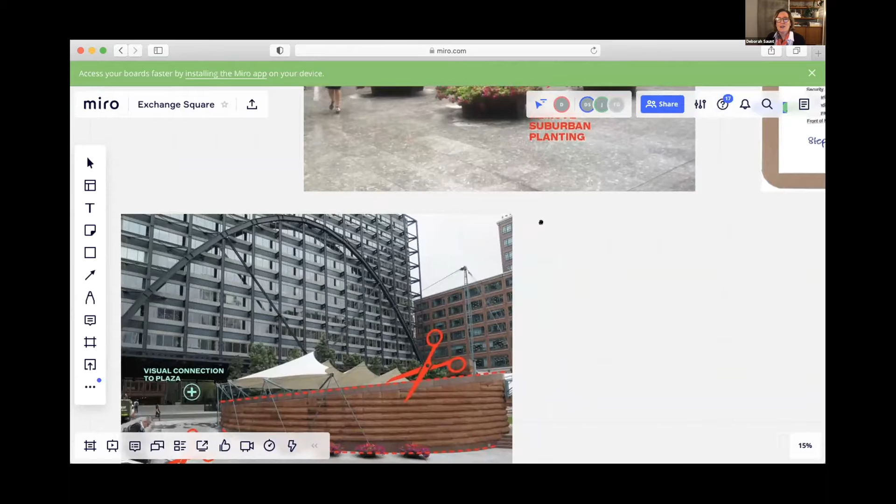And I think our most poignant commentary from a horticultural point of view, James might agree, was there was a preponderance of what we called suburban planting in these rather awkward planters. And the sense of nature seemed to be extremely mediated and sort of controlled.

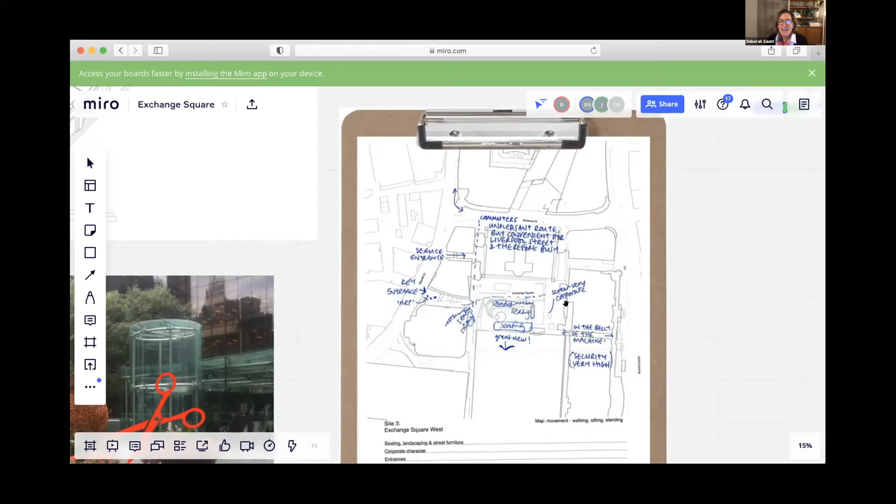So the idea of being outside, we wanted people to really feel that. As part of the competition, we set out with our whole studio to look at what people were doing on the site. We did a quick survey discovering how people were using it - for example, in Exchange Square there was a great view, but to get there you had to go through the belly of the machine, and there was an unpleasant route nearby that was very convenient. So it was a kind of ganglion of things going on, and we wanted to bring simplicity and clarity to it.

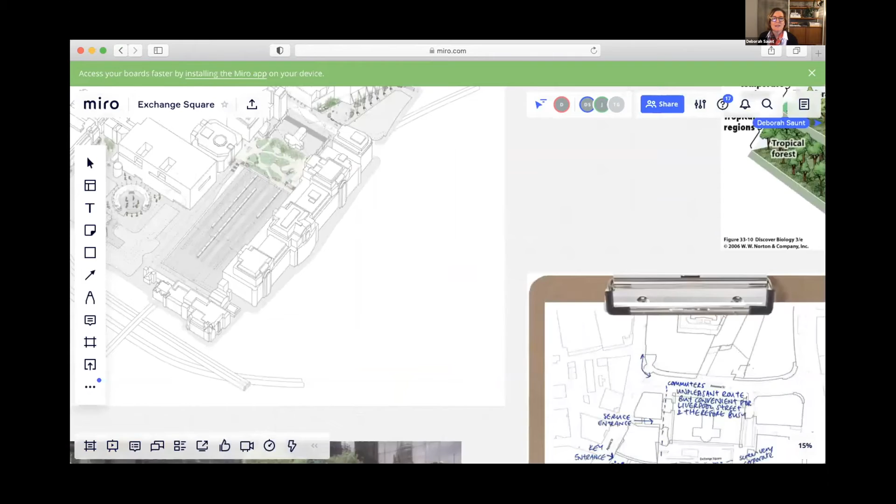So our commission was to look at all of the public spaces originally, and not to come up with permanent solutions, but just to see what we could do as quick, agile, temporal interventions - particularly in the Circle that had just been refurbished, in Finsbury Avenue Square next to the Foggo building that was about to be refurbished, at the base of the Broadgate Tower and Broadgate Plaza, and then long term to look at what might possibly happen here at

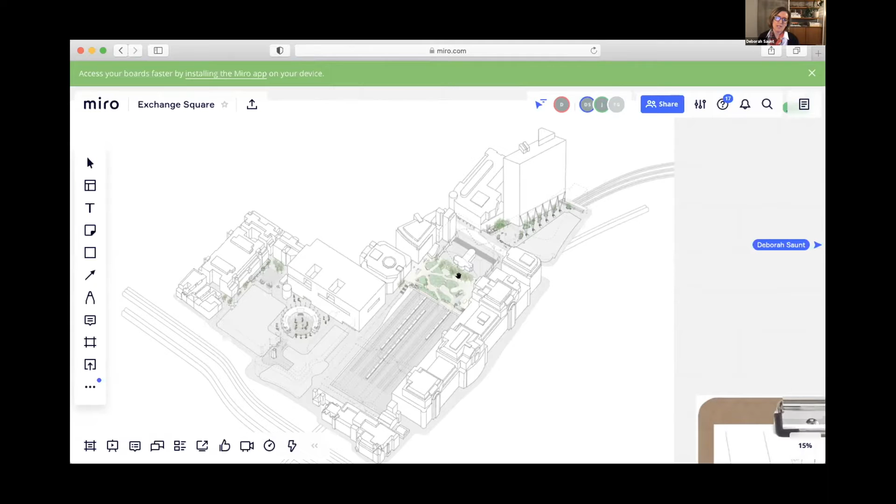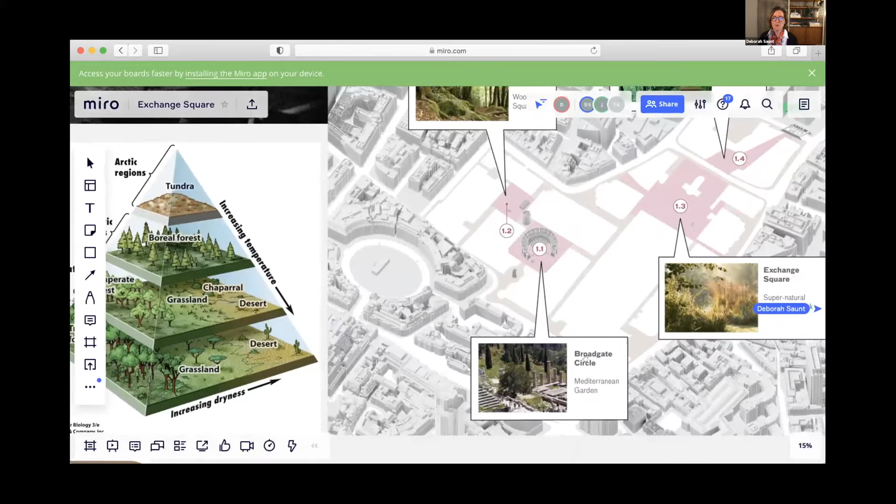Exchange Square. So some of the first things we did were to look at how we might take those conditions as found - to look at how we might find a particular landscape quality and environmental quality.

I think it was Tom who landed on this idea of biomes, of looking at the way that throughout the spaces there were these different kinds of microclimates, and one could almost relate them to the different temperate, or sort of subarctic even, or tropical regions that one finds within the biodiversity of the world.

And as such, we ascribed the warm space of Broadgate Circle with a Mediterranean environment, the woodland almost Scandinavian Nordic feel of Finsbury Avenue Square, the Exchange Square as a verdant place - we really wanted that to be a wildflower and super abundant environment. And then we looked at the plaza as being potentially bamboo.

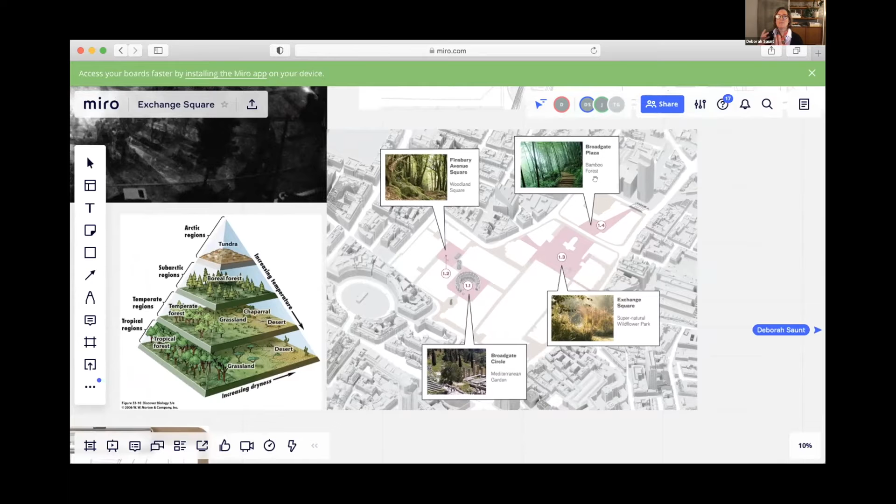But we also managed to do some more research - one of our first requests to the client was to ask for their CCTV footage of the Circle, which was our first project that we looked at. And from this, we could understand how the space changed from being very busy to also being very empty.

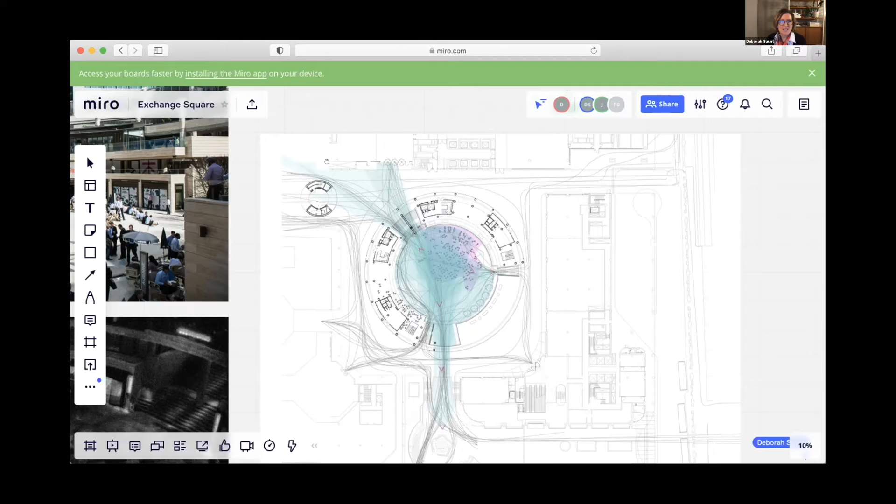So you'll see people just really clinging to the edges here, and this rather intimidating void in the center. In fact, we made this map which really showed there was a huge amount of commuting going on through this square, and a large amount of what we call vertical drinking coming out from the bars to one side, and that was almost creating quite a hostile environment for people, or intimidating.

So from that, we looked at our Mediterranean designation that we'd given it, and looked at disrupting that flow and disrupting that centrality, and creating a series of mobile landscape elements that would give a kind of intimacy to an otherwise very grandiose space.

We also did the same kind of research on Finsbury Avenue Square, which really was a rather cool environment, particularly with this sort of strong grid and the darker buildings next door. We took that and created a rather wonderful screen with a few retail units inside of containers that would act as a kind of active hoarding.

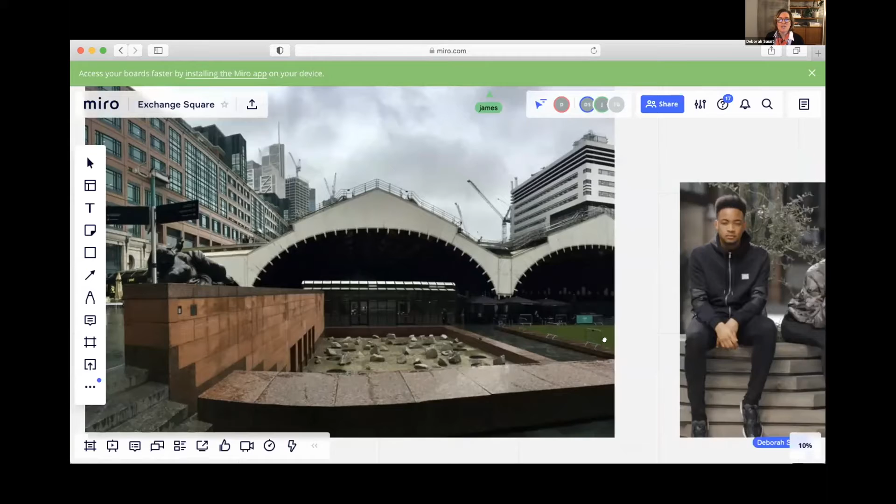So armed with this, we set about our journey looking at the landscape and the architecture of Exchange Square. And at this point, I'm going to zoom out and hand over on this rather fine image of what was to be awaiting once the design got going. So over to you, James.

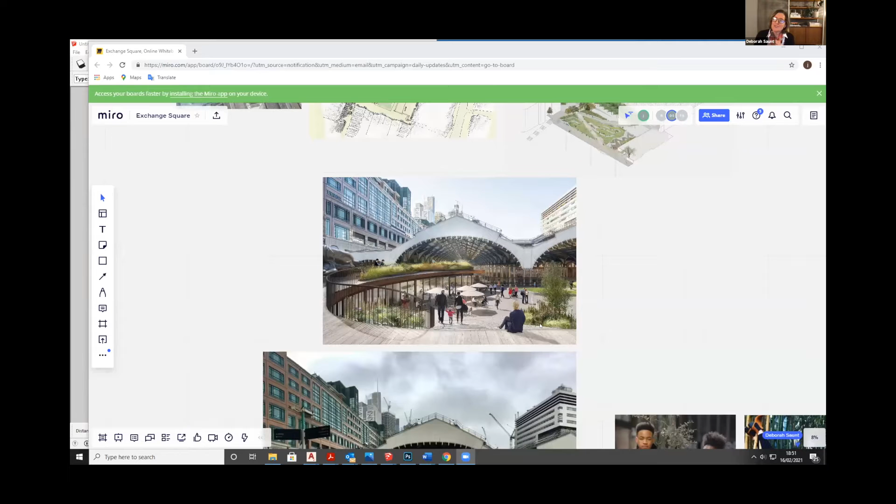Spoiler alert, don't look at that picture. It was more about the view looking over the train station that our research had uncovered from those comments. So I'll let you take over.

There we go. So here we are in Exchange Square, and that process of experimentation and trialing projects - actually some of those projects have already disappeared because the building sites they were shrouding are gone, or the planters have moved around somewhere else. That process of trialing eventually brought us to the position of being asked to look at Exchange Square, not as a temporary scheme, but as a significant permanent scheme.

So we began to look at it and we wondered, what sort of a place is this? We were discussing it earlier in the week. It can be very hard to conceptualize landscapes because they're so solid and they're present and they have such a strong existence. It can be very hard to imagine them to be anything other than what they are.

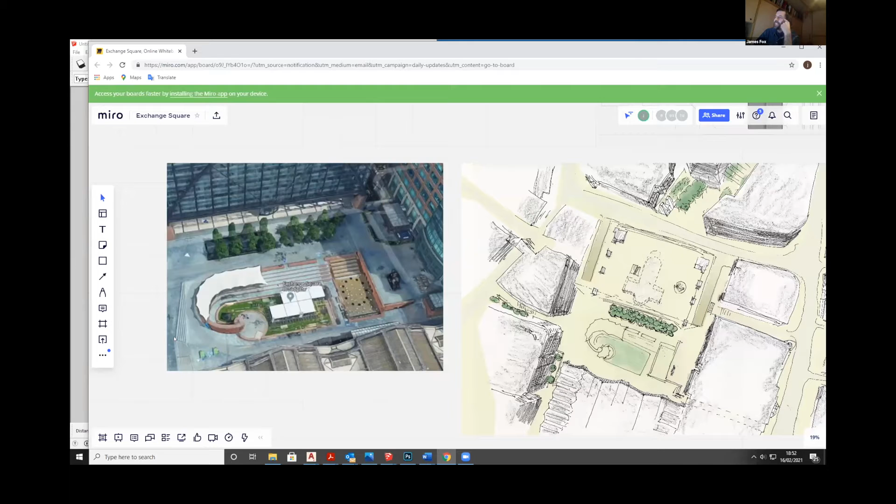So we began a process of exploring what kind of place this could be through drawings and models. And the first thing we did was we began to draw what it is. And actually through drawing what it is, we noticed something - sorry to squeeze around so much.

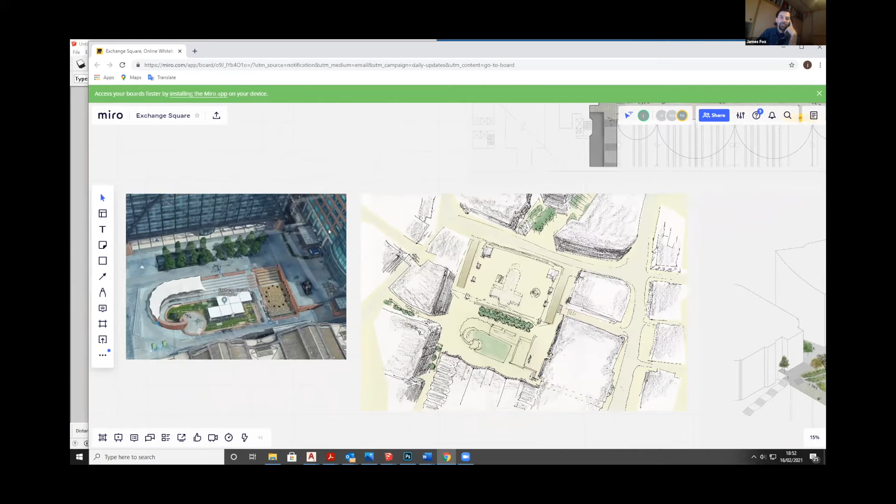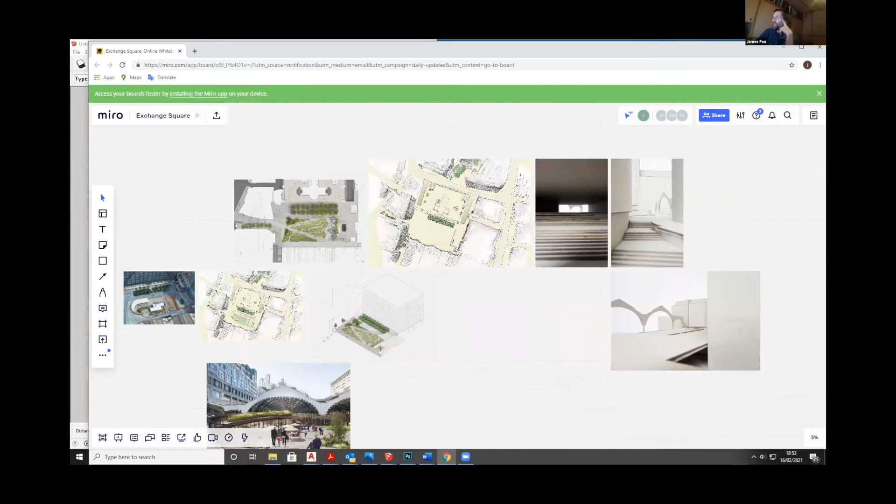So we asked ourselves, well, forget all of that. Forget the shape of the amphitheatre and the strange wall, which Deborah showed with the scissors on it. Indeed, cut those things out. And let's start with a blank canvas and ask ourselves, so what are the potentials here? What can happen? And we drew it blank.

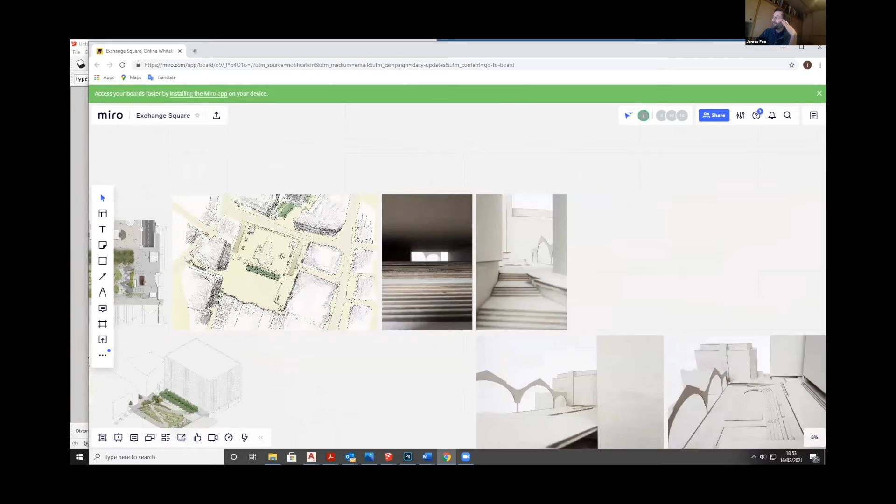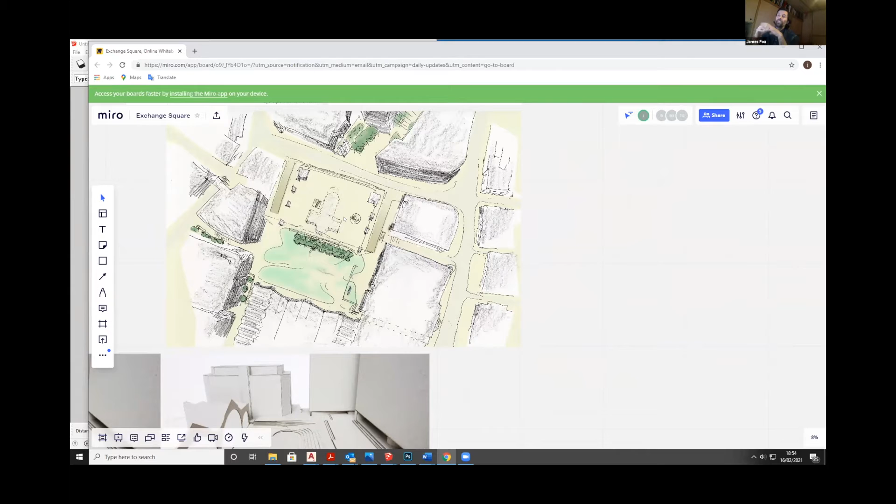And over here, we modelled the space blank as well, just as a way of beginning to explore what the possibilities were beyond what we found there already. We came to the conclusion that we needed to think of the space not as a paved space with some landscape in it, but as a landscape with some paths in it, which is a critical distinction that makes the shift in typology between square and park.

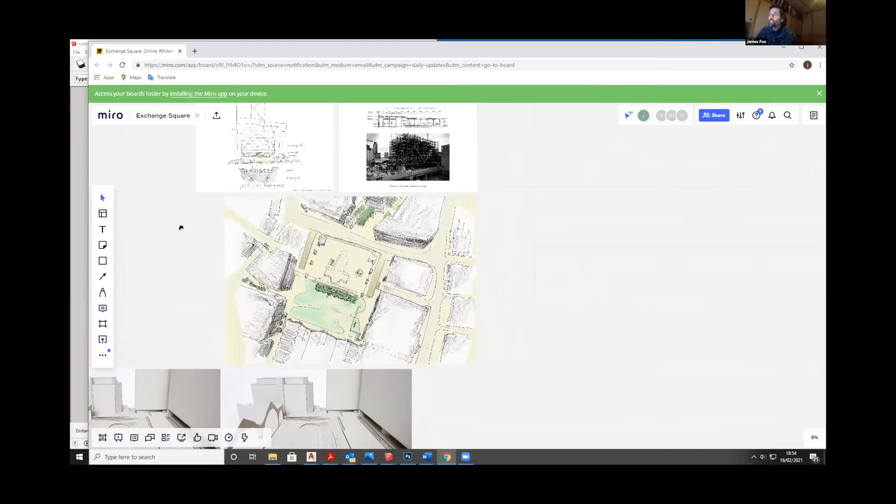A square is often surrounded by a road or some paving, and in the middle there's a patch of green. Whereas a park is a green space that you go through. This was a really important shift in our thinking about what kind of place this ought to be. And indeed, nowadays, the project is called Exchange Park, not Exchange Square.

Historically, Broadgate, when it was originally bought, was a relatively cheap site because it was two strips of development to the east and west of Liverpool Street Station, with the trains coming out of it. As such, both strips were slightly undervalued because they only had a streetscape to one side. A really brilliant move that the developers made was to build a huge bridge over the railway line between the two strips of development.

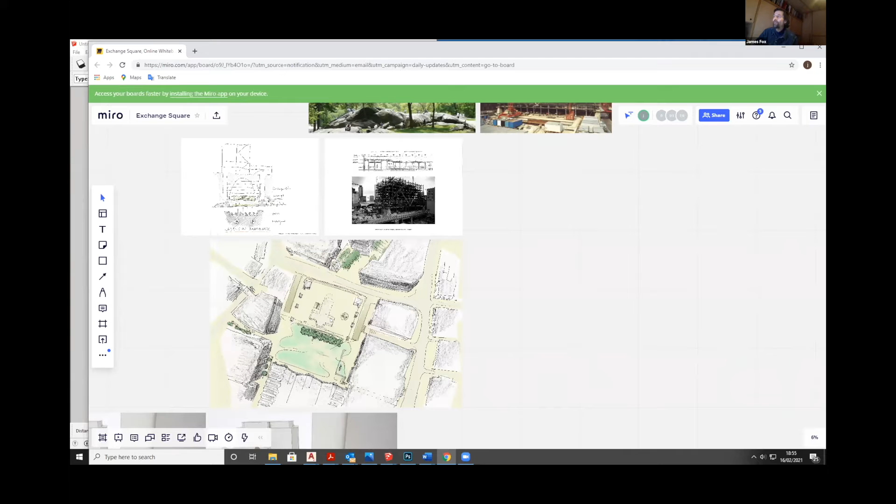That bridge is partially Exchange Park, as it will be, or Exchange Square as it was then, and partially Exchange House, which you can see here. So here's Liverpool Street, here's the railway line coming across, and here is this really brilliant move to join up the two strips of land they owned either side of the station to make a campus. That campus had Exchange Square at its heart.

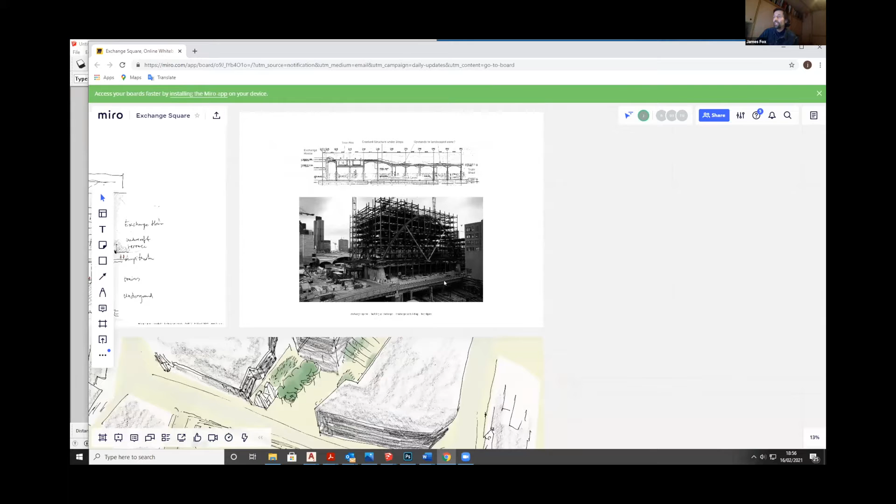So when we began working on the project, we were thinking about this layered landscape of elements that existed there. We wondered how we could acknowledge that this is an artificial landscape, just one layer of many. At the bottom are the tube trains, then the trains themselves, then our strip of green, Exchange Square or Exchange Park, and then buildings bridging over above.

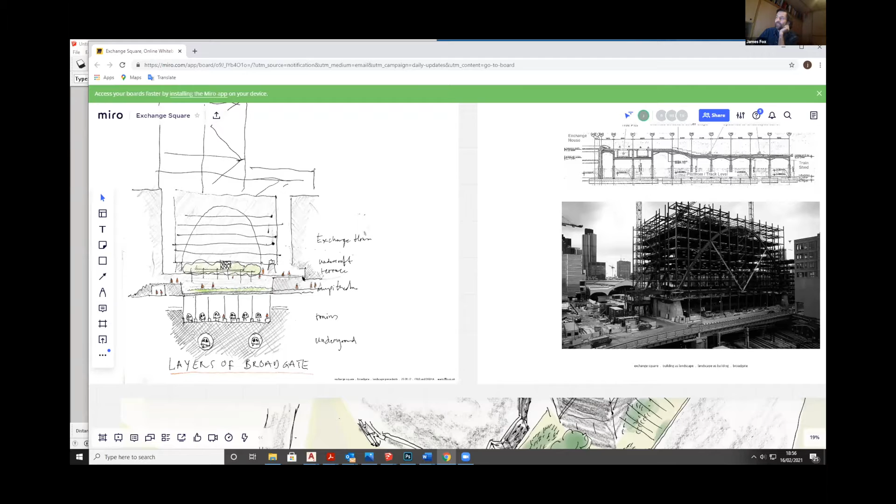And even to either side of Exchange Square, there are little tunnels for people to find their way through. So actually, although we experience it as a surface, it's this amazing stratified artificial landscape that we're moving through when we're there, which you can see a little section of, how it works over the station.

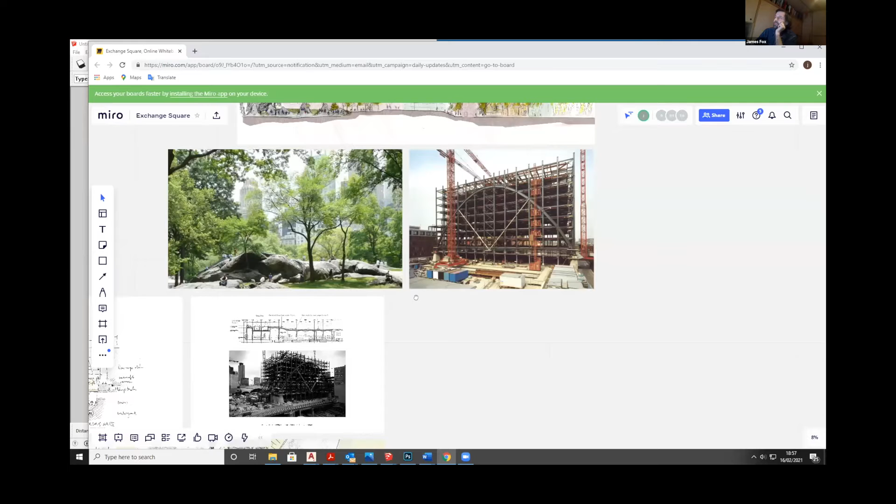And we thought about this stratification, and we thought about artificiality, and we thought about how something natural and something artificial could come together. We had the idea, just a fairly loose idea, of artificial rocks. We thought of this kind of strange artificial strata of rock that we might run through not just Exchange Park as it would be, but also through to Broadgate Plaza beyond.

And we looked at the shapes of rocks. We also looked at the flows of people through the square and how the shapes of rocks might somehow inform or help people to move around the space.

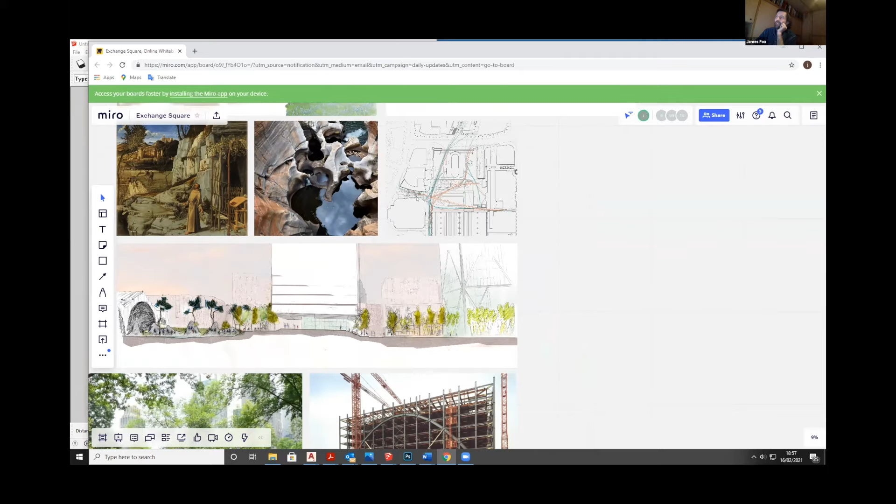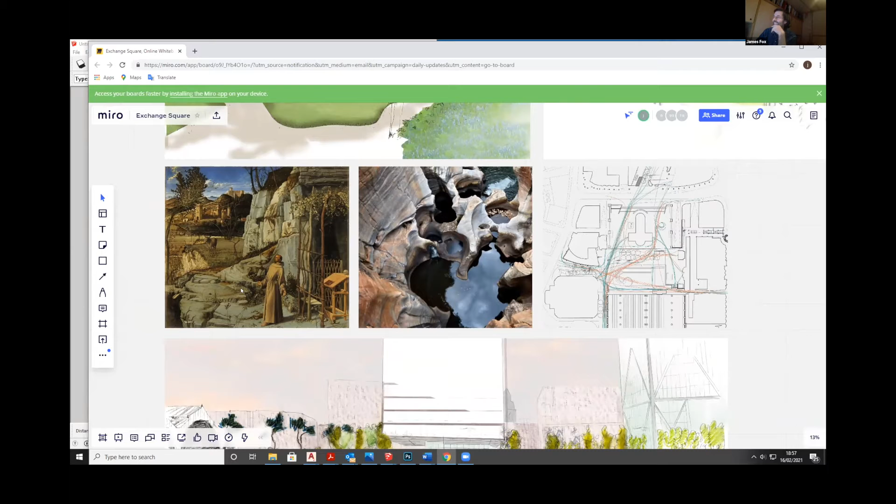And we looked at historic interpretations of rocks, this Renaissance drawing of, I think, St. Francis in the rocks with his donkey, and we analysed the way the rocks were working in the view to frame the landscape and mediate between the people and the landscape they were inhabiting. And we did fun sketches of artificial rocks to explore what they might look like in the context of these arch forms of the station.

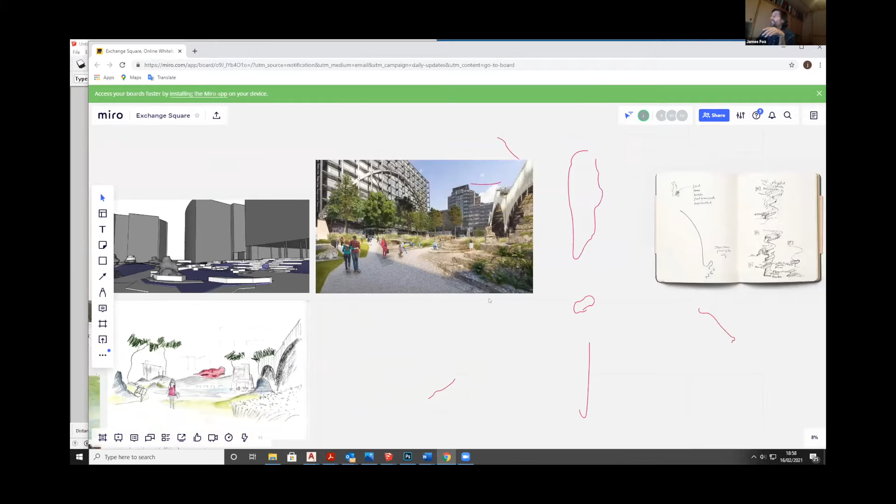And although we haven't drawn it, the more rigid geometry here of the buildings around, we've modelled the rocks in 3 dimensions. Rocks are quite a handy form, especially artificial rocks, because there's quite a complex topography we needed to negotiate here. And here we eventually reached the end of stage 3 with our rocky proposal.

You can see that there's some strong affinities with some of the things that have gone before here. The planters that Tom and Deborah and David designed in Exchange Square had this kind of stratified nature, and in fact we thought of them as rocks in a Mediterranean landscape. So there's a kind of learning from other projects coming through here, and people would inhabit these rocks as they do inhabit those planters in Exchange Square.

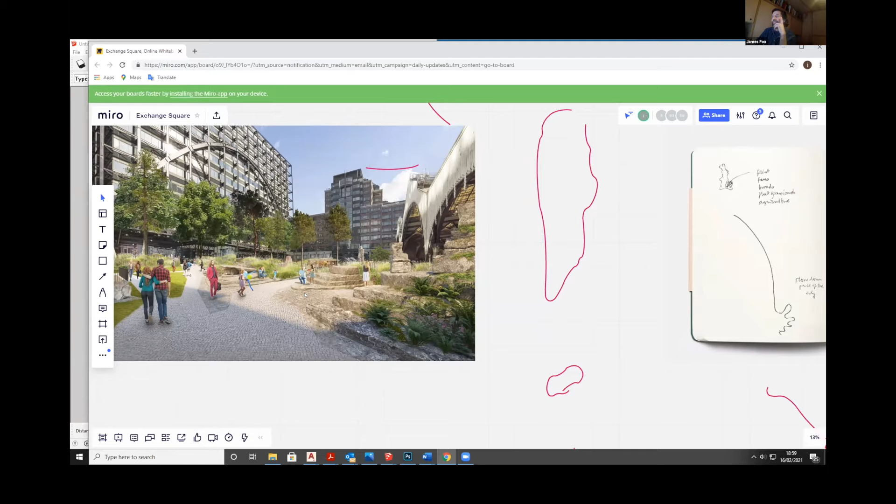So there was our proposal in the circle, which Deborah has already talked about. So there was our proposal, but no, we got to that point and British Land looked at it all, and they're a very liberal client and actually very supportive of our ideas all the way through, including the artificial rock idea.

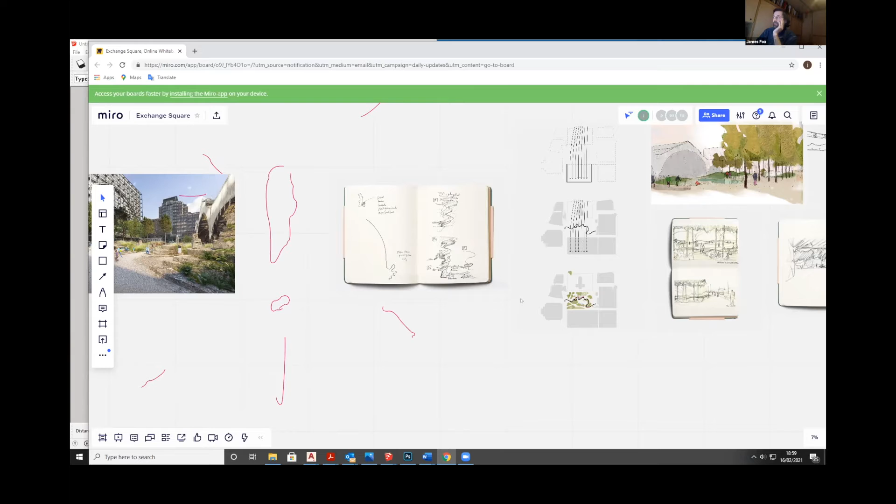But they looked at it all at this stage and they just thought, this is a bit too much. But they kindly, rather than telling us that we had a bad idea, said there's many good things about this, but you just need to rethink it because the rocks are too much. So we tried to think about what the essence of it was that we really still wanted to achieve, even though the rocks were gone.

One thing was we enjoyed that the geometry of the rocks, although it responded to the surroundings, particularly the topography of the site, it was also contrary to them. And in this way, we felt it created perhaps a more natural feeling space.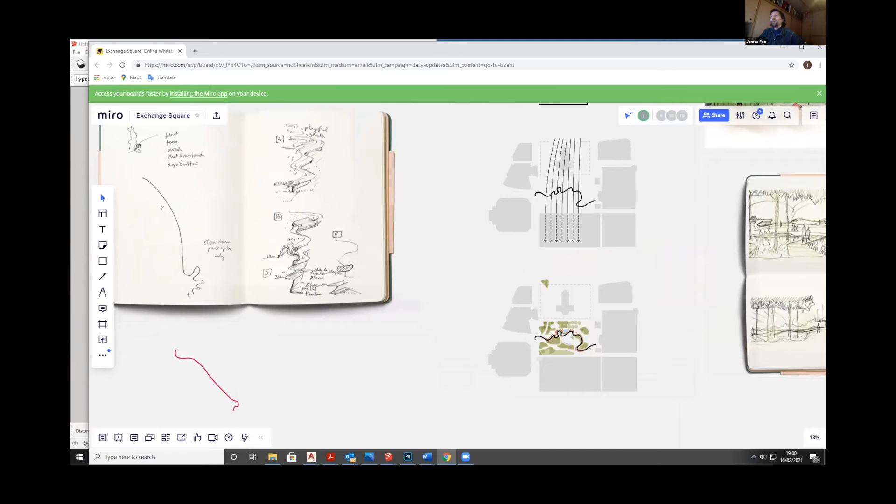And we showed the idea, we forgot about the rocks, but we showed the idea of these kind of simple curving lines that draw you through the landscape and how they're in some ways contradictory to the more rigorous lines of the city and people rushing about going from place to place in the most direct line they can. And we did more sketches as before, exploring how these lines may bring people in a more gentle way through this landscape.

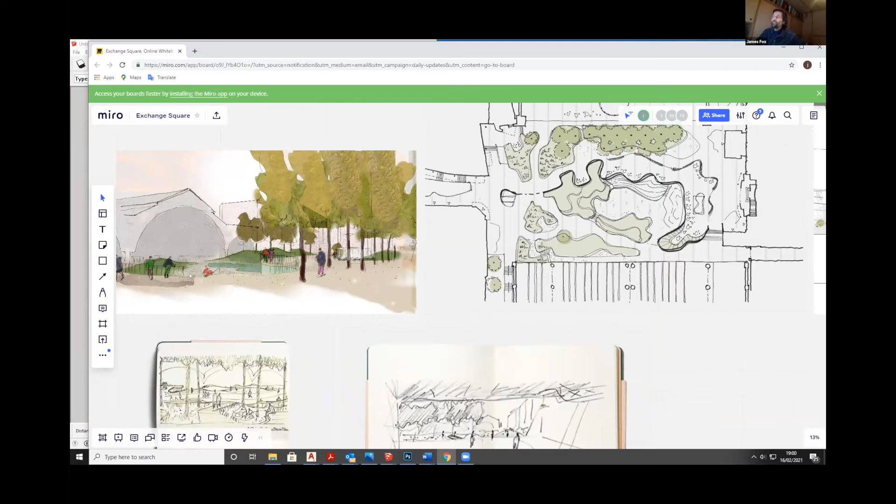And these sketches developed into more beautiful sketches, exploring how these gentle lines moving through topography work against the geometry of the station with its curve, and then the more orthogonal geometry of the buildings around.

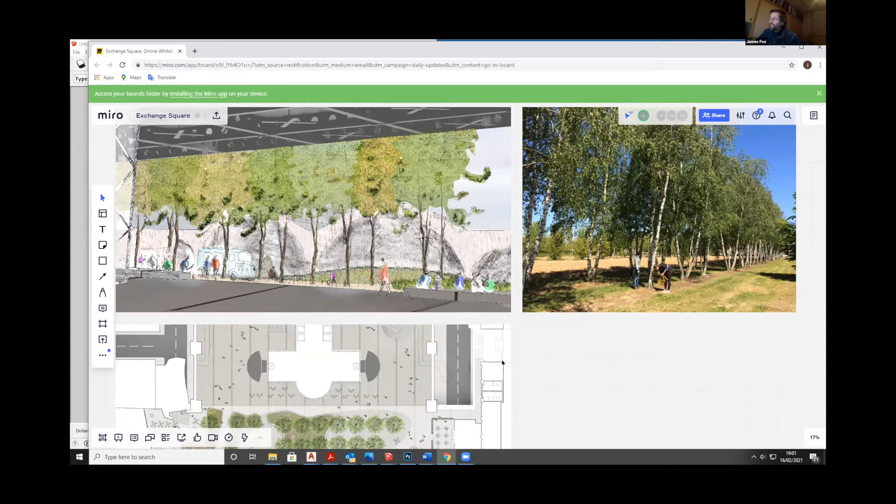So I just wanted to take you on that journey of exploration of the project, what its potential was and how it could be, that was mainly done through drawing, modelling and workshops. Wanted to mention also the client Bernard, who worked with us through this phase, was extremely supportive and brought many of his own ideas as well.

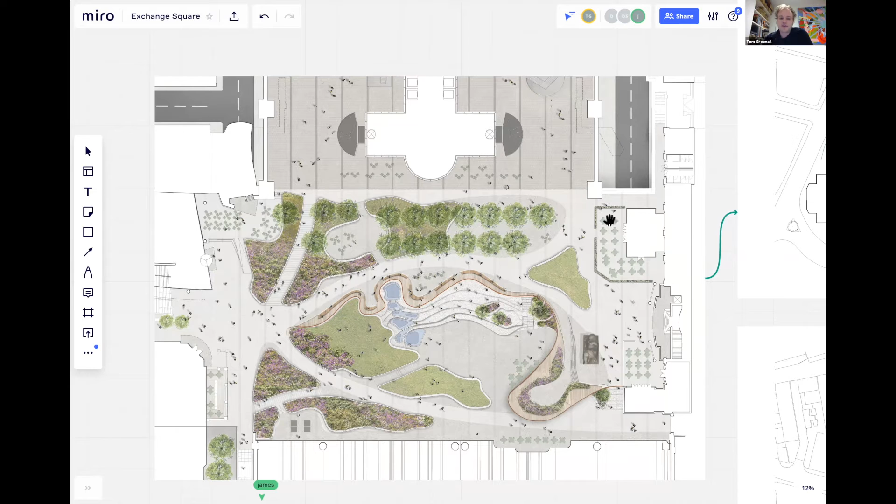So everyone through James' presentation, through Deborah's presentation, you've had a glimpse into the design that has started to emerge for Exchange Square, which is captured by the plan that's on the screen at the moment. And I guess what was always important to us was to draw not only the square but the wider connections to it, and that was one of the core values or principles established by the team, by our client team, and by the design team very early on.

That first and foremost, this was no longer about the square being a kind of protected environment in the heart of a commercial enclave. This was almost about doing the opposite, turning Broadgate inside out in order to welcome people through and to increase the porosity and permeability of the site, and to offer up these generous public realm spaces within what was previously considered to be a campus as genuine public spaces within the city. So that was the first and foremost primary objective or value that we brought to the project.

Secondly, and importantly to mention, it was essential that this landscape was entirely accessible and inclusive to everyone. That really meant doing away with all those ramps and steps that almost divided the space, creating barriers to access rather than means of access.

The third value, whose importance can't be overstressed at the moment, was that we were keen through this project to address the biodiversity crisis we find ourselves in. So we wanted to not only increase the amount of green amenity space accessible to people, but also increase the biodiversity of the site, not through monocultural landscapes, but through lush, dense and varied planting. All of those things are captured in the plan on the screen.

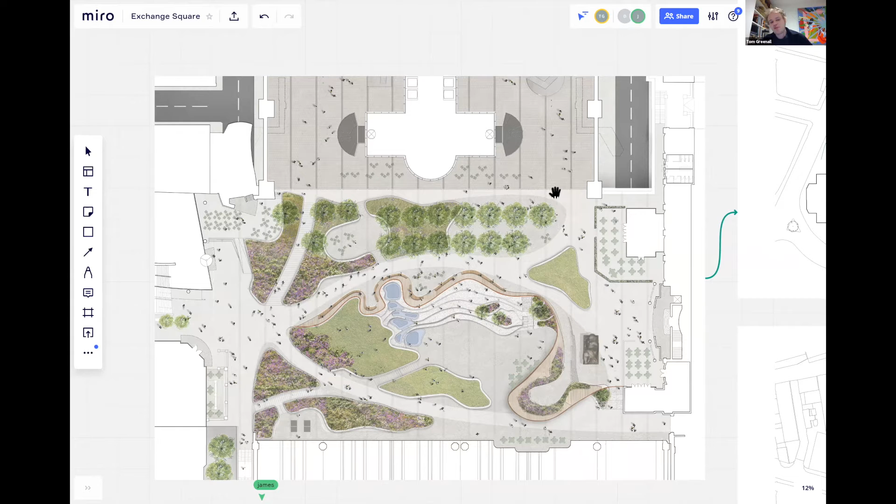This plan was, as James mentioned, predicated on studies about movement around the site. We spent a lot of time at Broadgate really analysing how people use the space at the moment, in order to understand desire lines and perhaps less anticipated connections between certain elements of the estate. What this really revealed, when it came to Exchange Square, was just how prominent this north-south route is.

From Liverpool Street Station in the south, through Exchange House's undercroft space, through the plaza, onto Bishopsgate. And this is only going to get stronger as developments like Principal Place to the north, and other developments within Shoreditch, really enforce that expansion of the city.

But one of the issues we realised was that with this north-south circulation, because of the imposition of this landscape feature within the design, as shown here, you can easily pass through the space without even coming into contact with a piece of greenery. The wall acts as a complete block to the small lawn that sits in the middle.

Secondly, and important to mention, as railway sidings, or a gorge carved into the ground to allow trains to pass underneath, there was a real severance caused by the railways to east-west movement. This was also a criticism of the campus mentality of the site; it severed off areas of the city and didn't really address the problems created by the imposition of the railways in the first place.

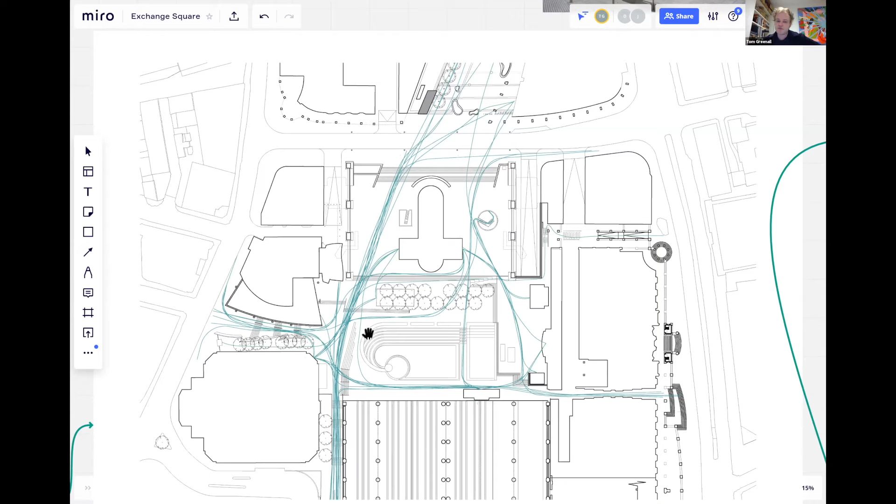So with that in mind, we undertook a study of anticipated movement, shown in orange—how we thought people would want to move through the space if features within the landscape didn't prevent that from happening. Through doing this, we opened up more routes to connect Bishopsgate on the east with Appold Street on the west, to support greater permeability through the site, allowing people to pass through but also to come in and enjoy the landscape.

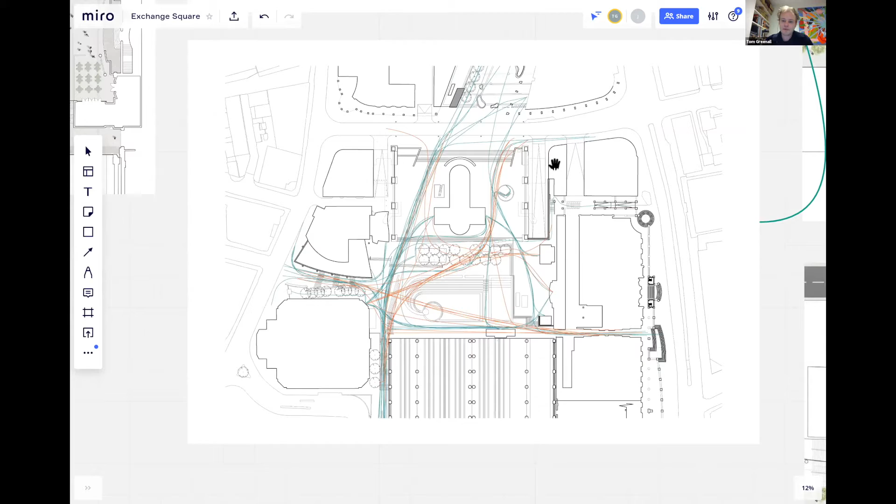As you can see with this overlay, those routes and paths carved through the landscape—as James mentioned, paths carved through green space, as opposed to a green space in the middle of a square—facilitate both direct movement north, south, east, west along routes we know are popular commuter routes, but also importantly created a series of secondary, less direct, exploratory routes through the landscape, allowing a different pace of occupation of that space.

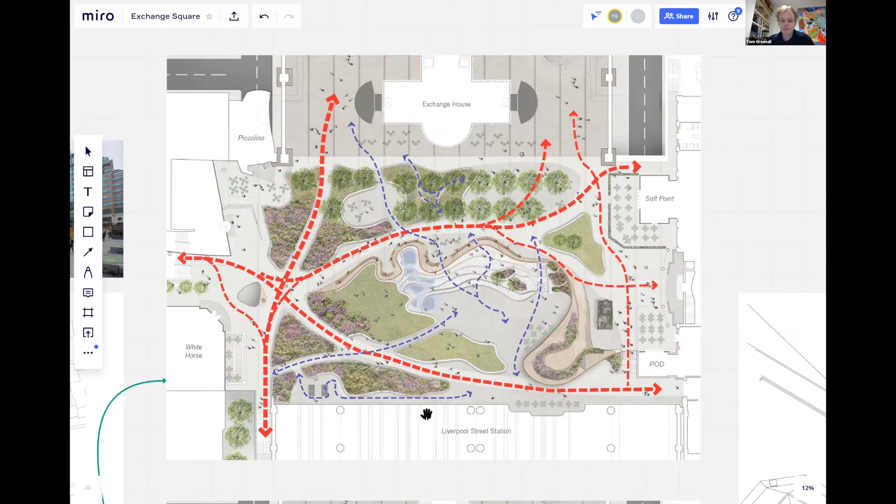Those spaces in between where people move are then given over to areas for activity. One of our criticisms of the existing design was that the lawn space in the middle was also allocated as the activity space, so on a seasonal basis the lawn would be ripped up or destroyed for events to take place, then re-landscaped. Our design was predicated on creating spaces where activities could happen without any disturbance or disruption to the planting.

So a series of large zones are created within the design for different types and scales of activity. And then lastly,

Exchange Square in the summer, if you've ever been there when the screen's been on and the tennis has been playing, is an incredibly busy space. Thousands of people congregate here.

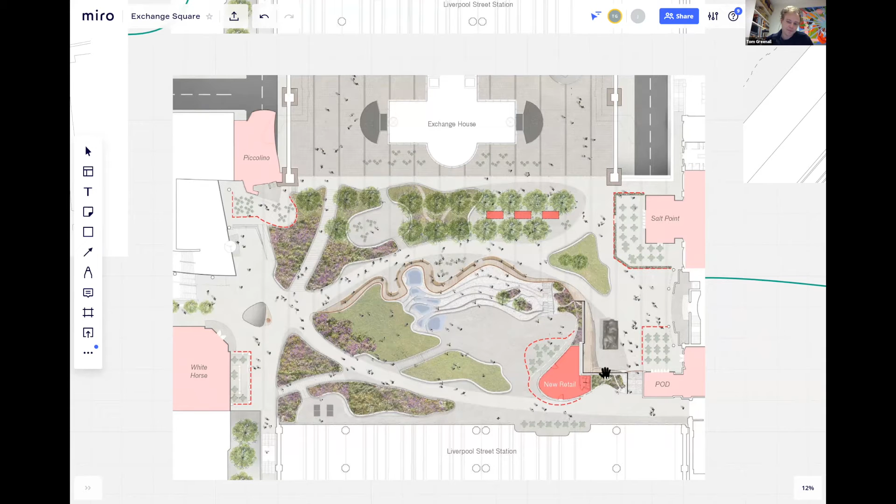So there was a need for additional retail to support activity within the space, but also to help finance the upkeep and maintenance of what was quite an extensive landscape scheme. So the design includes a new retail unit that hugs the corner of the space, grown out of the landscape, and also framing the activity space in the centre of the design.

So all of those considerations led to the design, or a design very similar to what you can see on the screen at the moment.

One of the key things, in addition to these smooth, accessible step-free routes through the space, is this wavy line that is cast through the middle of the site. This line describes a new topography, or at least allows a new topography for the site to be established around that line.

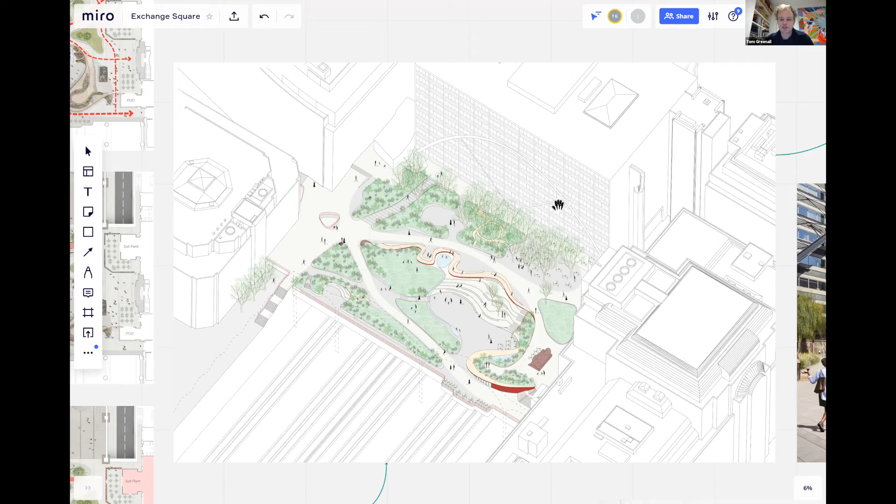So hugging the line, we have seating, we have a water feature, and it emerges out to create the retail unit. Off this line, it really becomes a spine through the space onto which different activities are grafted, but it helps to structure the new environment.

So just to give you a little glimpse of how this space will look, here you can see that main north-south movement route with the view to the plaza beyond, but also the less direct and less clear secondary route that draws you into that space between verdant planting, offering a strong sensory experience as you move through the space.

And then what you can see here, just grown out of the landscape, is that integrated retail unit that emerges from the ground to form a new kind of peninsula.

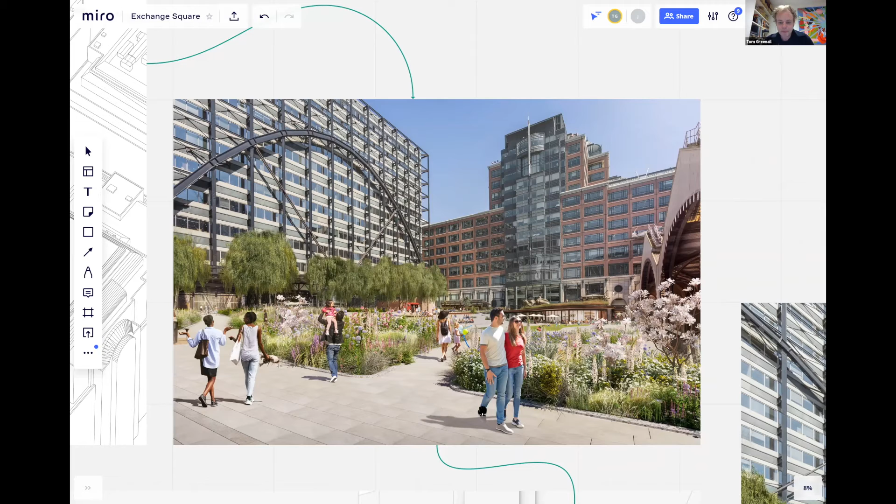That's perhaps more easily understood by this drawing here, where you can see this line cast its way through the landscape, traversing and weaving through it, then emerging out of the ground very gradually to create the canopy for a retail unit.

So it acts as both a step, an anchoring device, a seat, and also shelter for sitting beneath as part of the cafe. And on top of the line, at this location, you create a peninsula that gives you amazing new views into the Grade 2 listed shed of Liverpool Street Station.

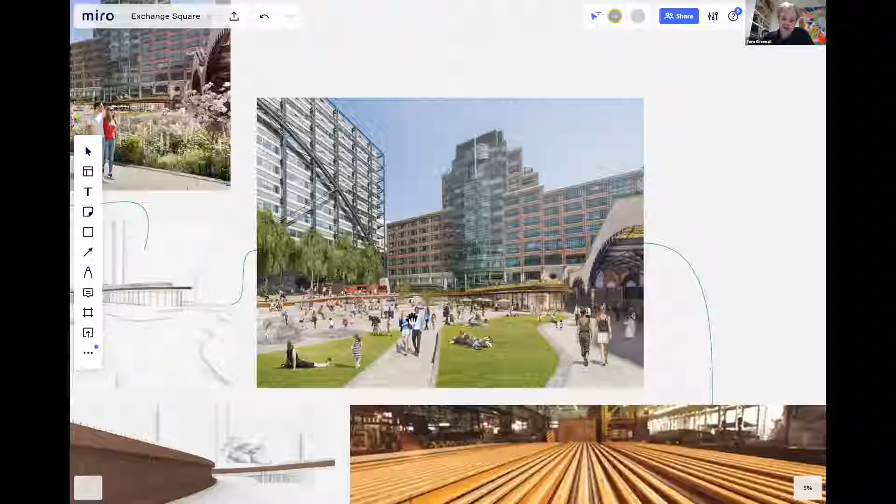So again, just to show you what that might look like, slightly more photorealistically. Here again, we see the line describe its way through the landscape, emerging out and creating a new planted terrace, so extra green space in the square.

It's also worth noting this reconfigured water feature in the space, which is intended to be fully accessible, something children can come and play in, particularly in the summer—a series of shallow pools that cascade their way through the landscape. So something a lot less formal than the type of water feature you might expect within a commercial development.

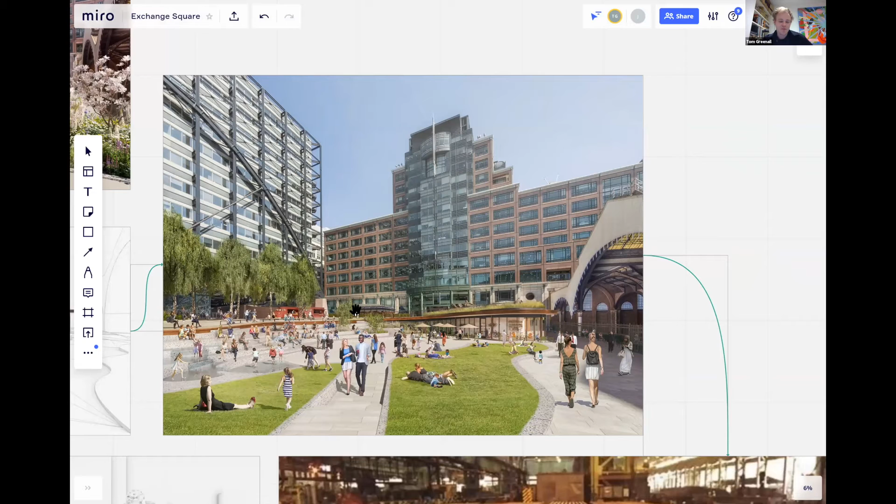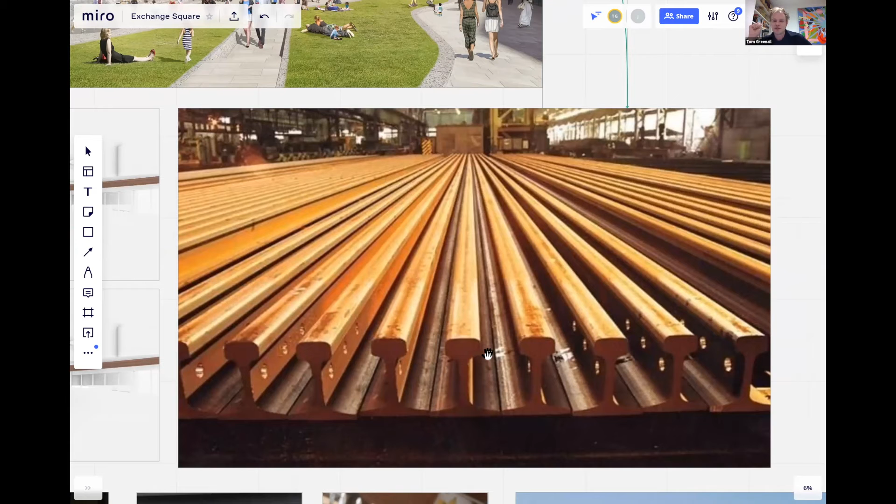And that line, I think it's important to reinforce what James said, was really about making sure the connection to the railways and life below the park acknowledges that this is a completely constructed landscape, as opposed to something planted at grade. So it was inspired by the form and materiality of the railway tracks that pass below.

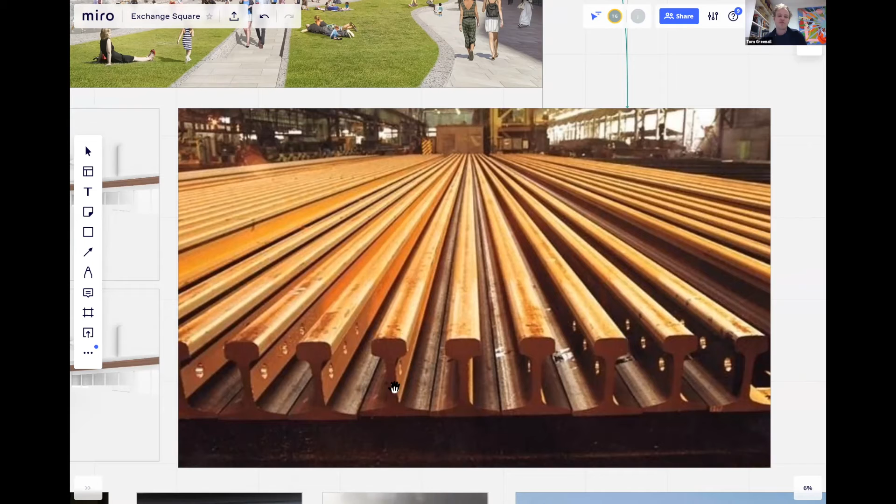So the design and profile of these was used to inform the design of a series of cassettes, or almost like vertebrae, that form this line, into which we've integrated opportunities for lighting,

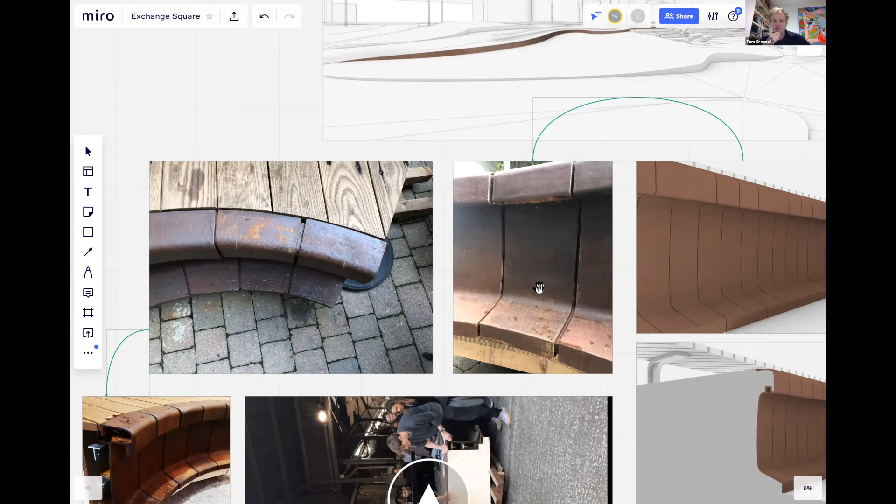but also other less expected features. It's a big part of the process with this project—testing, prototyping, exploring materials and how they weather, and also not being too precious about how they weathered, but enjoying the fact that we wanted the site to have a sense of temporality or duration.

So these were a series of mock-ups photographed in our yard in Vauxhall where we work. You can see here how they form part of a larger mock-up.

This perhaps starts to ask a question about how many architects it takes to move a mock-up out of a warehouse next door to our building. But eventually we did manage to drag it out. This is it, kind of pride of place in the yard.

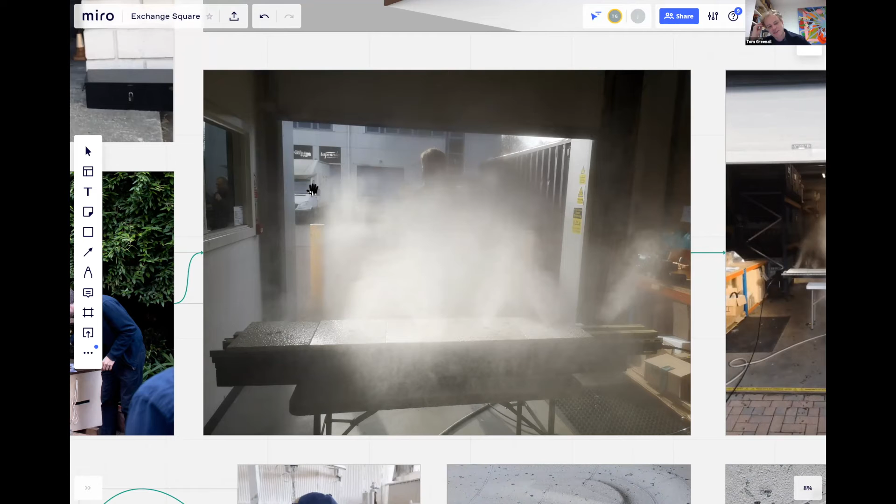Here you can see how this line establishes a series of different opportunities—both a step or datum to the landscape, but also something on top of which a new winding seat anchors itself. The perhaps less expected feature is that, on the schedule of the trains passing underneath, at certain times of day mist will emerge from this line to create similar effects to these.

This is something our team are currently prototyping and testing in a warehouse out in Weybridge. So the experience of this site will never be the same place twice. At different times of day the whole site will appear entirely different, which I think will enrich it as somewhere people will continue to go back to.

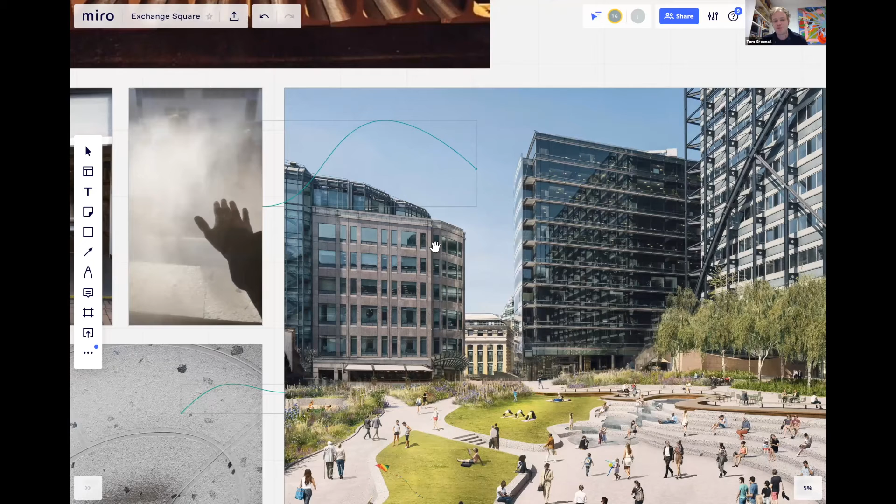Here's another overview of the design being built. You see that water feature, which forms part of the line from which the mist creates. Another important material throughout the landscape is used for the edges to the lawns and also this large tiered amphitheatre area in the middle—a material we've lovingly tested and honed over the last couple of years.

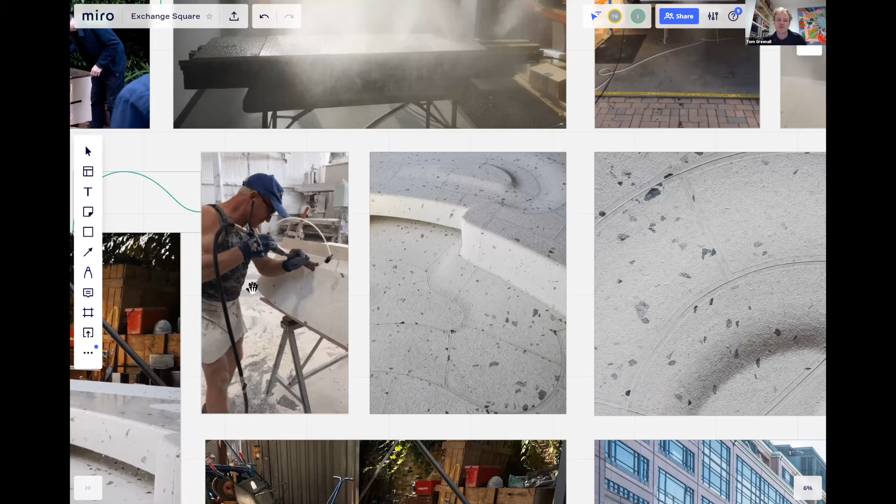Seen here in a mock-up sample made for us in Verona, Italy, before being assembled by the stonemasons next door to our office. You can see how they've assembled it with these seams, and here how this labor-intensive process, a kind of labor of love, is applied to finishing the stone in order to create these shallow dishes which become the pools of the water feature.

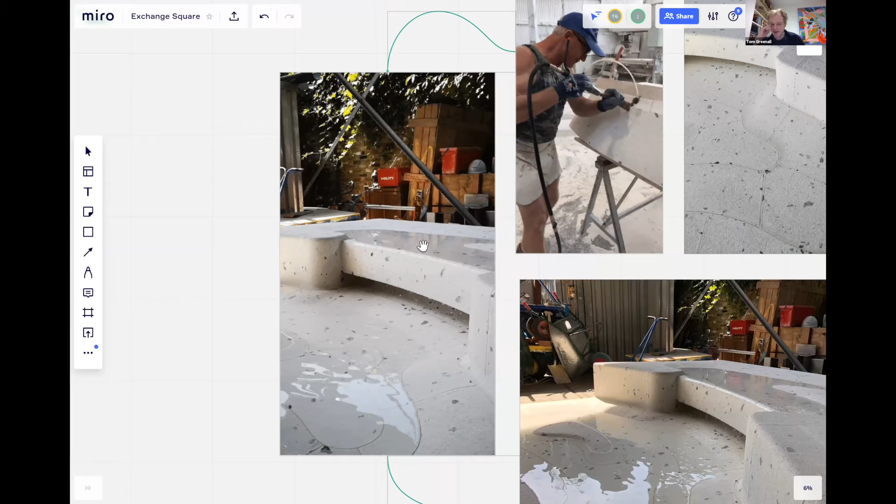So again, a mock-up currently in Vauxhall, with water being run over this landscape for the first time, to help us test how deep or shallow these puddles really needed to be in order to create the reflectivity and the sound of the cascading water that we desired.

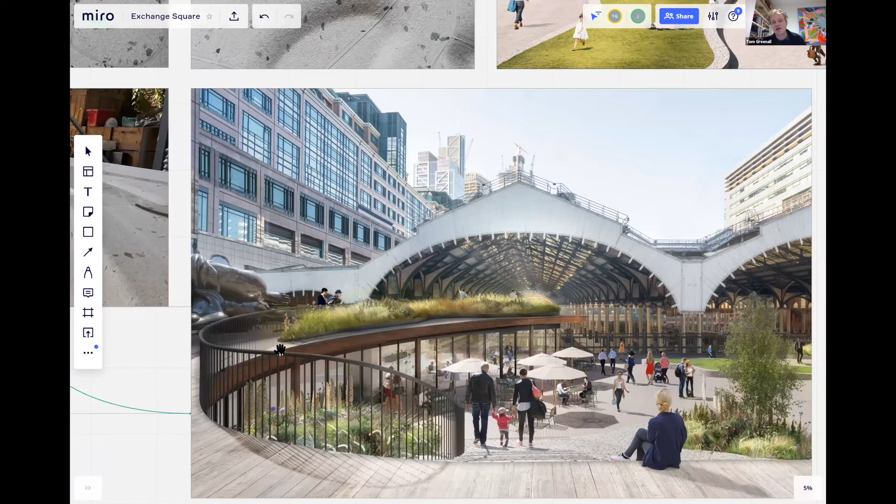Just to bring the presentation to an end, we're sat now just emerged from Exchange House, at the top of the amphitheatre. We see the retail unit climb out of the landscape, creating a new vantage point from which to look over the new activity space in the middle, and also into the fantastic structure of Liverpool Street Station.

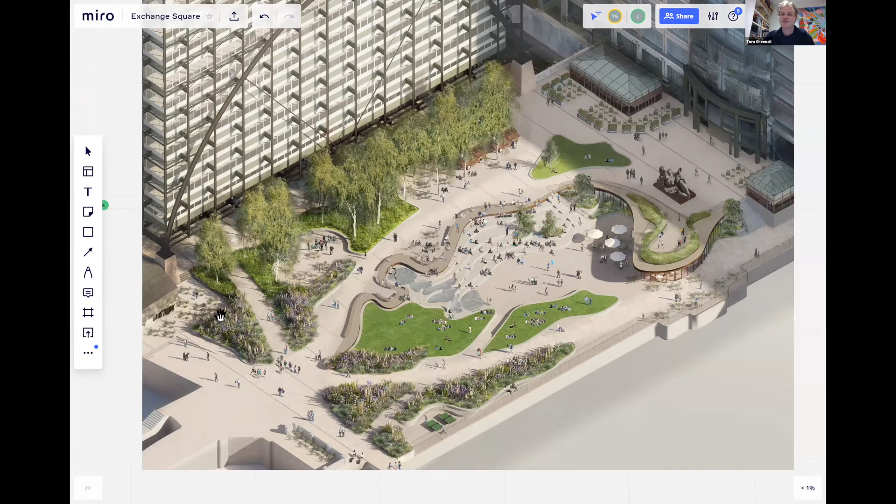So yes, thank you. Okay.

Great, thank you everyone. It was a fantastic presentation, and it's fascinating to see how the project evolved through the different concept phases. And it was very interesting to hear about the different qualities and identities that were selected for the whole development.

And I also think within Exchange Square itself, there are so many different pockets of spaces that will attract different users, and will have different planting.

And I think this leads on to one of the questions raised by the attendees: to what extent did the solar orientation inspire the design, and how much shade across the site is created by the station's roof. And it's linked to another question related to the structural capacity of that platform, which will have to hold all of the soil and the structures. So how was that informing the whole design process?

Who wants to take that one? I mean, as somebody who doesn't sit in the sun, I think we're all aware, particularly as we head towards 2050, with London being more like Barcelona by then, an element of shade is something that we embraced rather than retreated from. I don't know, what do you think, James, on the shade front?

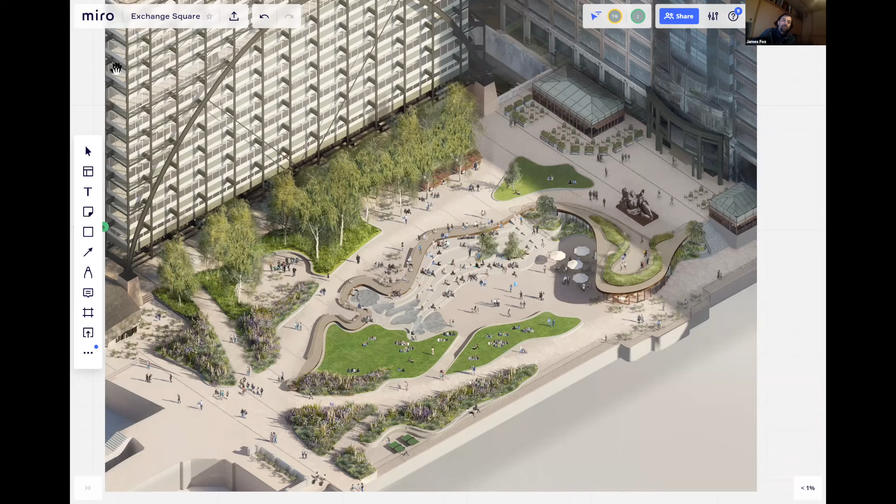So you can see that the core amenity space for people to sit around is the amphitheatre, set back from the station in the sun. But then we have a secondary layer under the trees at the top of the site, with plenty more seating in the shade under the trees.

Now, with regard to the planting, it's a continuous modulation from the shade of the station through the sunny, strongly planted perennial planting, to the shade-tolerant naturalistic planting under the birch trees at the top of the site.

We did also, with the loading, that really did limit our choice of tree locations. Because we really wanted to put far more mature trees, but there were these extraordinary loading drawings, Tom, that actually influenced that.

Yeah, you'd think that when building a slab, such a complicated slab over some railway tracks, you would just engineer the whole thing equally. But I guess one of the biggest surprises to us came when it was realised by Arup, our structural engineers, that it had been specifically designed to that curling landscape feature that moved through it.

So there's incredibly heavy loading beneath the existing water feature to hold the tank of water, incredibly heavy loading capacity on the stage feature just next to the lawn, and other areas like the waterfall cascade area, where it's assumed there wouldn't be a live load, were completely underloaded.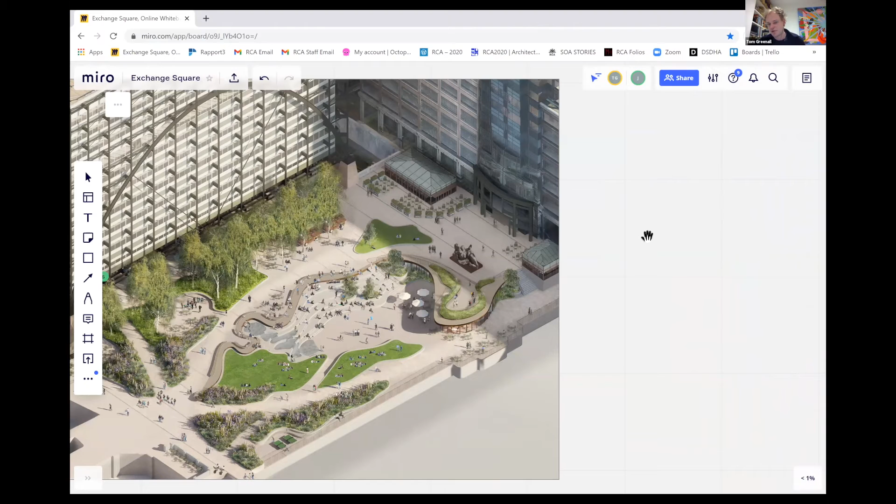So there are these steps down here to Appold Street, and then I think you also mentioned, conveniently just outside the image, this route here through to the Bishopsgate Arcade. So in short, when we were designing this, we drew a much wider extended area of influence. We can't see this image unfortunately, but the same kind of tree species that James has sourced here are also carried through onto the other side of Exchange House, onto Primrose Street, where there's some integrated planters. Similarly, we are in the process of influencing landscape decisions beyond the site, so at least there's a horticultural connection.

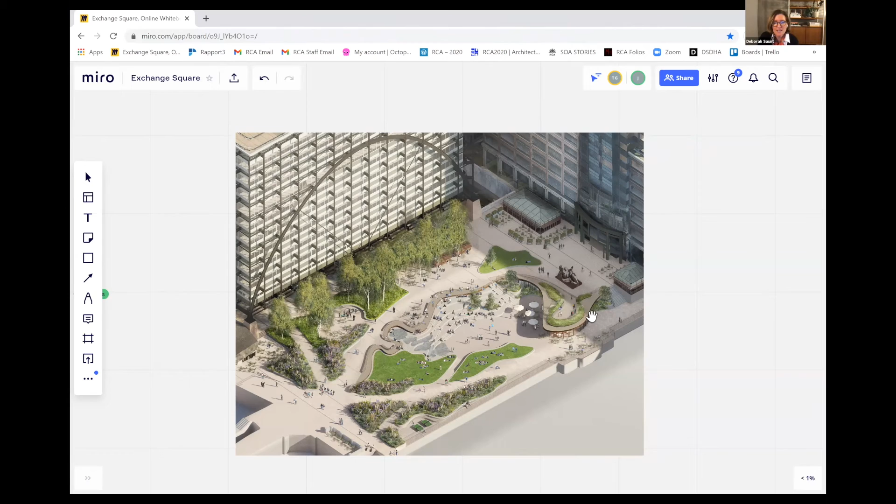Do you want to zoom in, Tom, on that detail where by the pavilion you've got the retail and the steps up? There's a hell of a lot of detail in the drawing. Yeah, that's great. I suppose it was just, we were trying to draw the greenery, as James was saying, as close to that threshold as possible.

So as you emerge from this rather dark, low, almost grotto-like experience as you come through from Bishopsgate, you get a hit of greenery. You don't see the whole space immediately. You see this retail, and then it opens out.

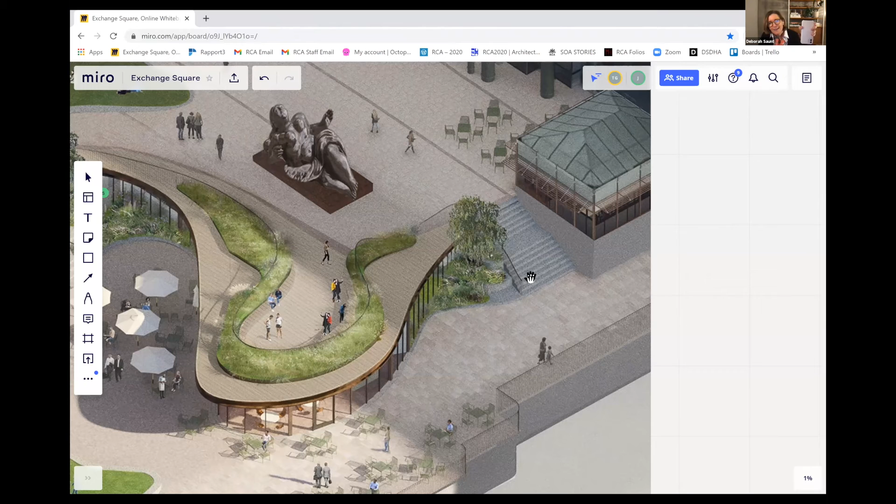I suppose there were some shots that you showed, James, of the model that we made, and we would take our mobile phones and sort of take them for a walk, moving the cardboard around, playing these quite picturesque games of unfolding views and unfolding landscapes, which I think when you see it in these aerial views doesn't capture that kind of layering.

One thing I would like to mention is that one of the most important things for us was providing step-free access as much as possible. This view really captures the threshold with the Undercroft of Exchange House. At the moment there's a four-step transition between the Undercroft and Exchange Square, and that acts as a device that severs one from the other.

By the simple act of raising the level of the square up to be the same height as the level of the Undercroft, you immediately reimagine the Undercroft as a covered space connected to the square, as opposed to something separate and above or beyond that square. So the seamless transition along this whole length reimagines the space as a kind of veranda of sorts, where you get a bit of shade, allowing really easy movement beneath.

I would just add that it's a good question about the interfaces with the buildings, but there's a greater question about the interfaces beyond the square. For example, the walkway that goes down the west side of Liverpool Street Station is a very poor connection, which actually severs the public realm in front of the station from Exchange Square. Because we're at podium level here, all around you have to go down a steep flight of stairs and between a couple of buildings to get into any kind of local streetscape.

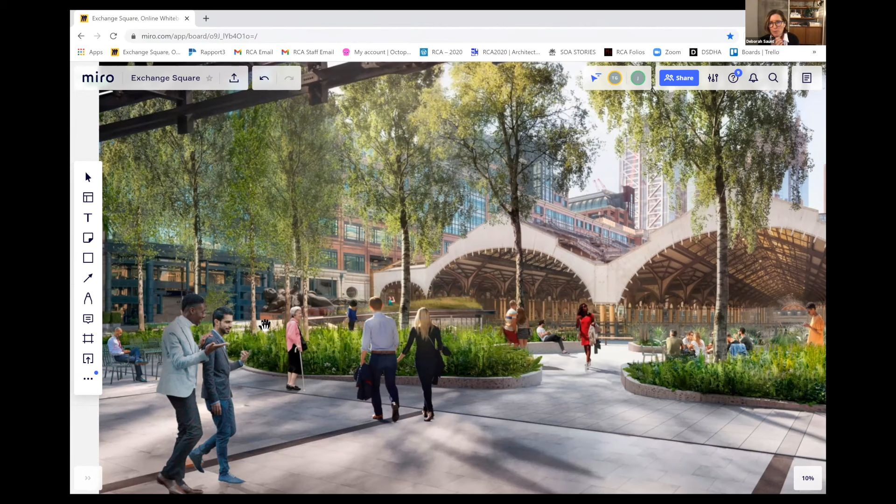But we did find as well, didn't we? I think you can see on our website there's a quote which reinforced a phenomenon we'd observed on other projects, but has actually been proven here, which is even though you have to go up several steps, have a difference in heights, and it's a longer route, a substantial number of people are now diverting through Broadgate and going through Broadgate Plaza up to the north, pre-pandemic, choosing to stay amongst the greenery and the biophilia we all feel, rather than the challenges of Bishopsgate. We met several people anecdotally who would always say, yeah, I come this way, it's a bit longer, but it's quieter, it's calmer.

So we know that people were doing that before Exchange Square was finished, because of that little bit of greenery in Broadgate Plaza. So we're hopeful that this will draw people through and give them some respite.

Great, I have a couple more questions here that are linked together. One is about whether there are any plans for activating the space with events or food markets, and how could that change throughout the season? And how do you see the seasonal life of this park changing across the months and even the years?

Do you want to answer that, Tom? I can do, yeah. I think there will be a whole host of events organised and planned for the space, as there always has been historically in that square. For us, one of the key considerations was to make sure that throughout those events, the landscape actually worked with the way the space was used and complemented these events, and that the events could complement the new landscape character of the space, so they weren't at odds with each other.